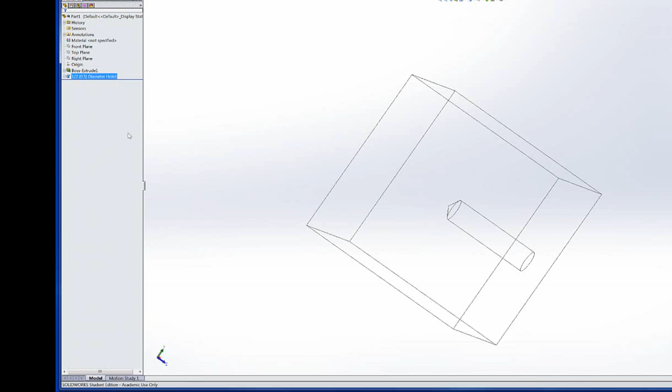We'll look at changing that up a little bit. We said we could edit that and make changes to that hole. Well, let's say we wanted to make that a counterbored hole.

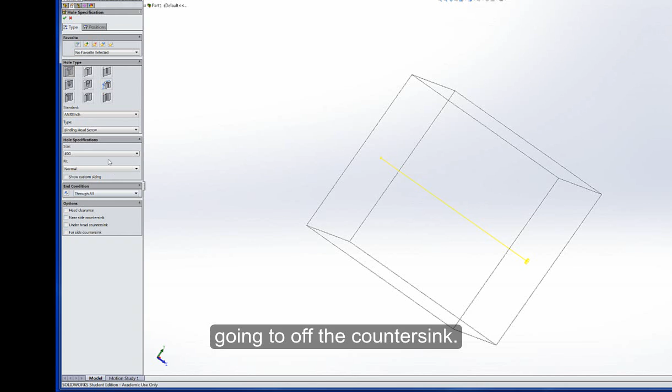To do that, we can go in there and see that down at the bottom, I'm going to turn off the countersink. But on the sizing, let's see, show custom sizing. And here are my different options.

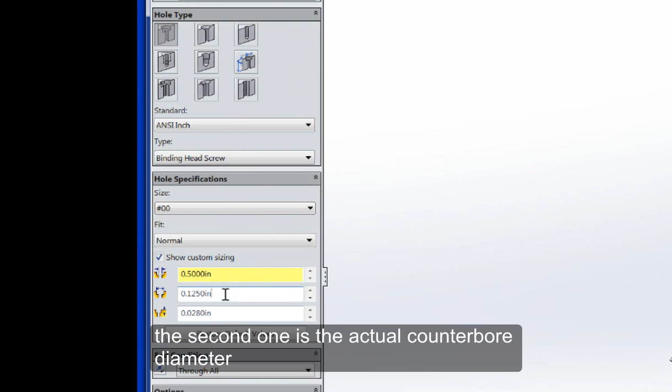If we zoom in on that, you'll note that this first diameter is the 1/2 inch that we started with, so we would go to 1/2 inch there. Somehow that got switched. The second one is the actual counterbore diameter, so let's make that 0.875.

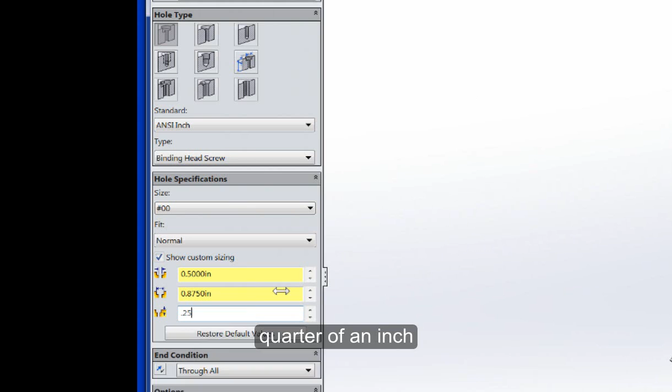I'm just pulling numbers out of the air. This third one is how deep do you want that, and if you hover over it, you can see that's the counterbore depth. Let's make that 1/4 inch. Now note it did default to through all.

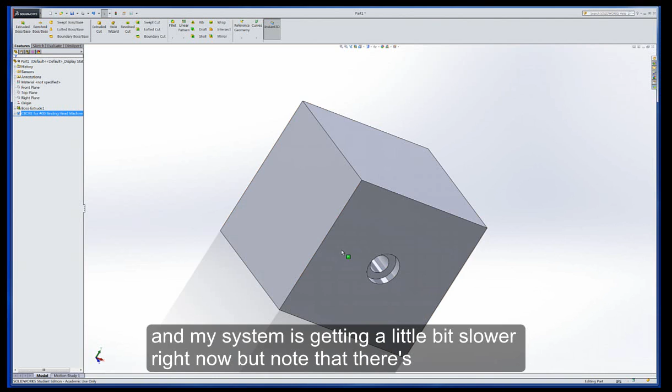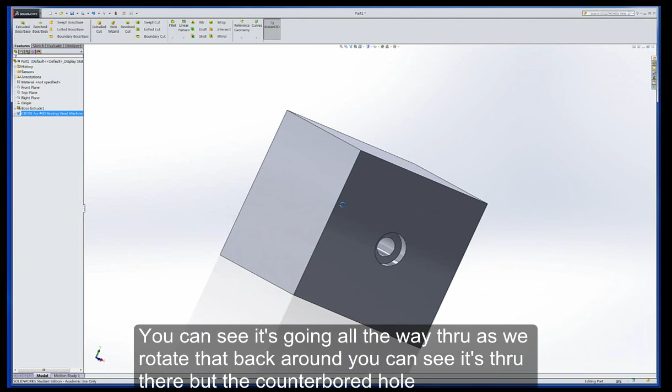So we'll leave that like it is, and we'll go ahead and accept it. We'll go back to our solid shaded image, and we'll note that there's a counterbored hole. You can see it's going all the way through, and if we rotate that back around, you can see it's through there, but the counterbored hole has that recessed area.

So the key here is we can change that to any of those different styles that we want. Now, let's say we decided we actually had that as a 1/2 inch hole originally, and there you can see everything came back.

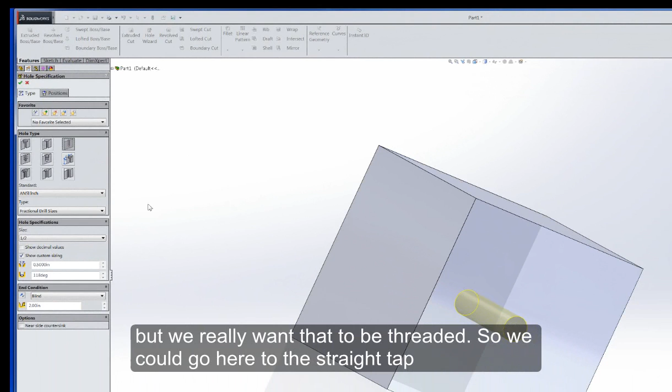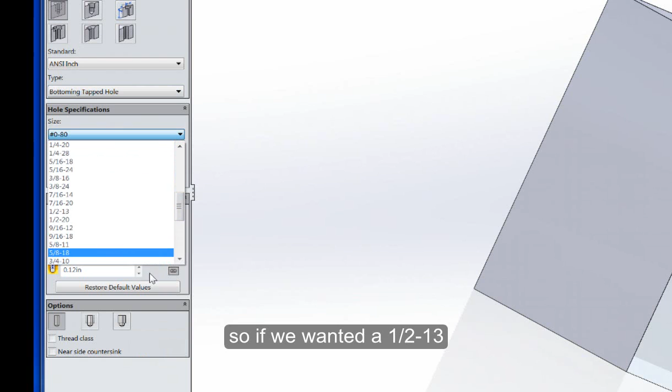But we really wanted that to be threaded, so we could go here to the straight tap and change this all around. Now this time, note this says #0-80. Well, that's the thread size. So if we wanted a 1/2-13, we could go in here, and there's your thread size, 1/2-13.

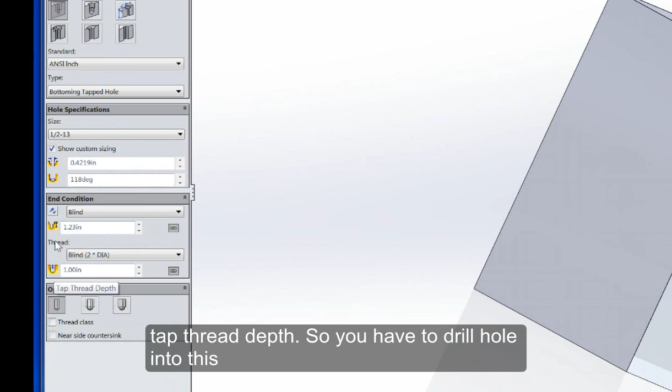Let's see, what else do we want on this. It is blind. Now if it's blind, notice it says this is the blind hole depth, and this is the tap thread depth. So you have to drill a hole into this part first, and that's called a tap drill.

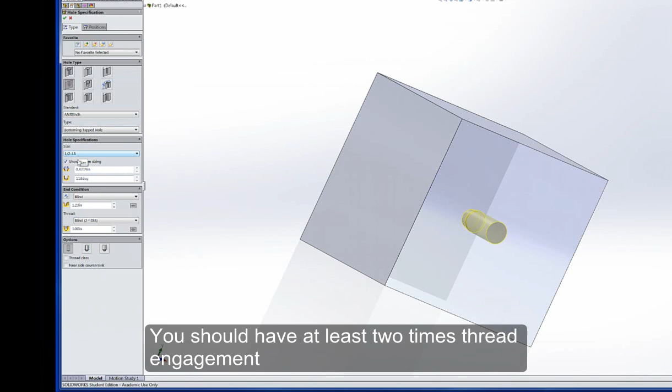You have to drill that first, and it should be deeper than the amount of thread you want. Notice this defaulted to 1 inch on the thread depth. That's because the system knows that if you're drilling a 1/2 inch hole, you should have at least 2 times thread engagement in that hole. So that bolt should go down into that hole twice as long as the hole is in diameter. So 1/2 inch times 2 would be 1 inch.

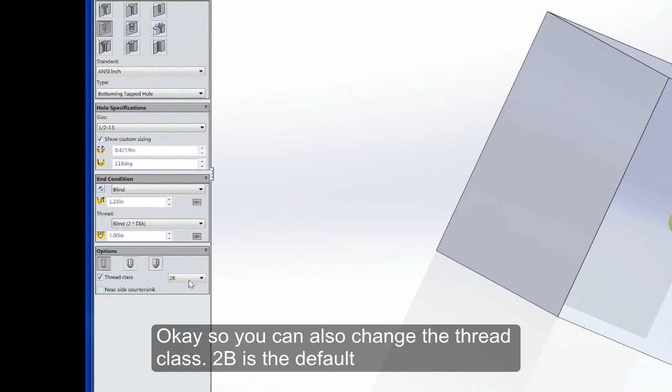Okay, so you can also change the thread class. 2B is the default, but you could go to 1B or 3B, 3 being tighter. But the general classification is 2B. The B just means it's a hole. If it's a shaft, it would be an A.

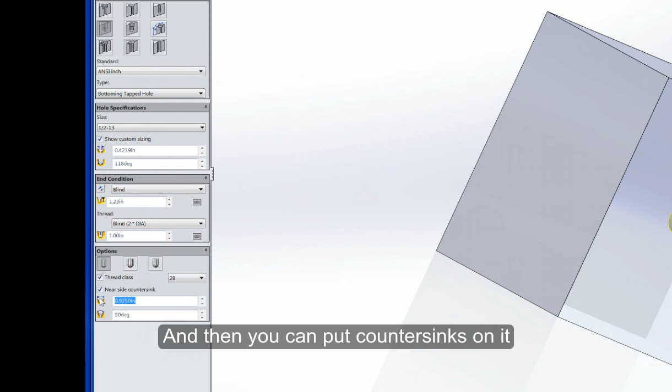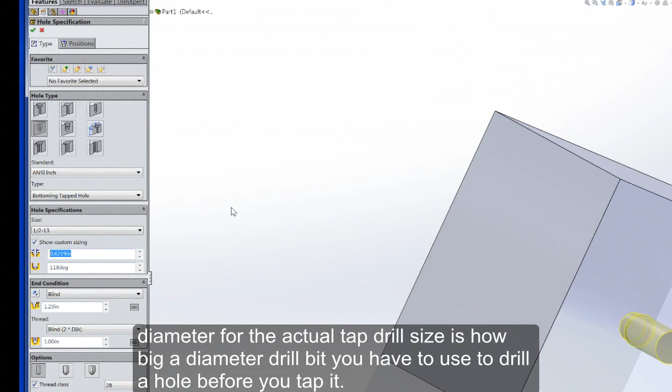And then you can put countersinks on it if you choose to. That's not a bad idea. So nothing has really changed there. Also note that this 0.4219 diameter for the actual tap drill size is how big a diameter drill bit you would have to use to drill the hole before you tapped it. That does come up by default.

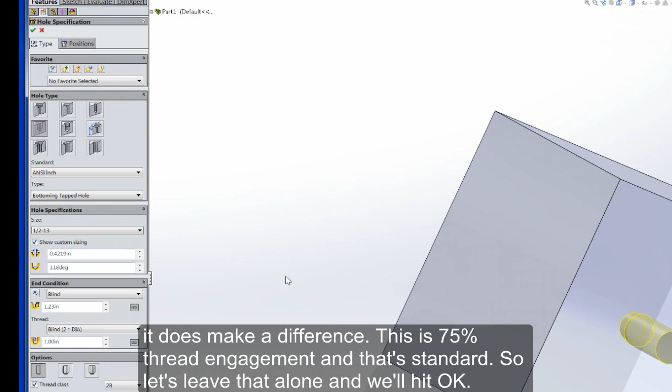Leave that alone. Notice if I go in there and change this to a 1/2 20, that number changes, so it does make a difference. This is 75% thread engagement, and that's standard, so let's just leave that alone.

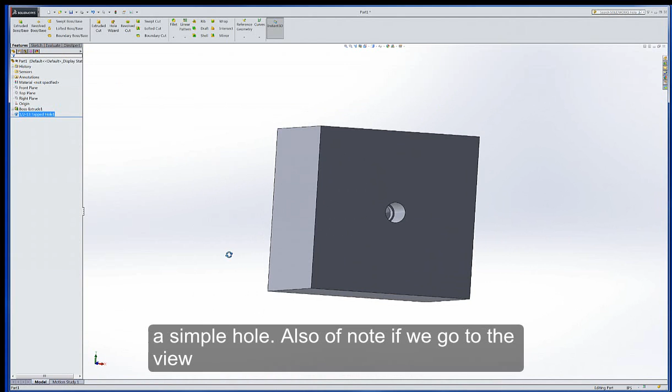We'll hit OK, and you can see that we now have... get off of there... we now have a threaded hole, as opposed to just a complex or a simple hole. Also note, if we go to the view that we're trying to punch this in at, notice there's a circle there that does represent the threads.

We also need to go in and maybe make a change on the options. We talked about options earlier. If we go in and look at that on the display, let's see, I don't think it's here. We're good there, but it may not even be in this particular view. I think it's under the document properties, detailing, I believe it is.

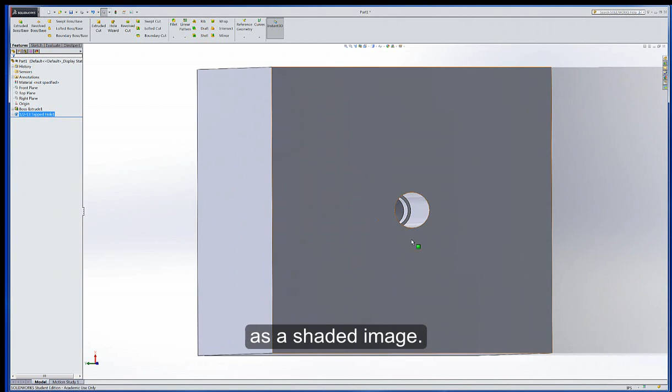Shaded cosmetic threads will allow us to see that as a shaded image. I've got some extra shading on here I'm not too wild about, where I've got that hidden part there. Let's see if we go back to options, I wanted to see something more than that.

Let's see... detailing... let's go to model display... and that's not it. That was the main one under detailing, it was the cosmetic threads. And there's shaded cosmetic, and then there's cosmetic. Yeah, I think we want to leave both of those on.

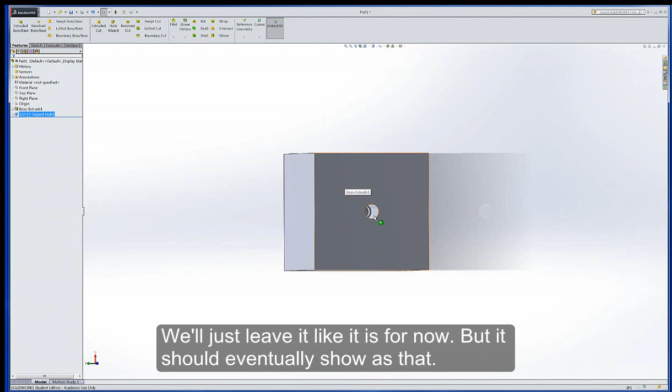Yeah, we'll just leave that like it is for now. But it should eventually show us that, and maybe we're doing something else here a little bit wrong. But so that's the hole in general.

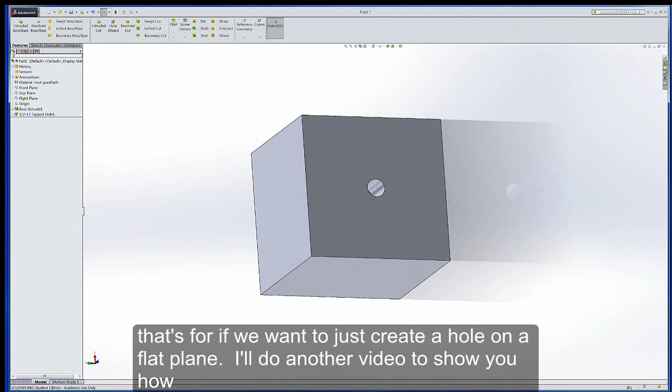We'll be using this throughout, but the main thing there was the placement as well. So that's for if we want to just create a hole on a flat plane. I'll do another video to show you how to do it if we're on a circular type feature, so if we want to drill through a pin or something.